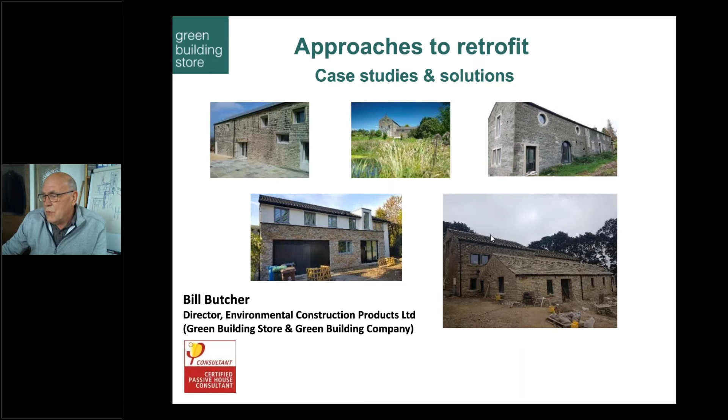Hopefully it won't be forever. So I'll just run through quickly: we basically work from the passive house methodology, fabric first - so insulation, continuity of insulation, forgive me if you know all this already, and minimizing thermal bridging, which is easier said than done with retrofit.

A minimal and continuous air tightness barrier if possible, for lots of reasons - air tightness is for comfort, for sustainability of the structure of the building itself, and for lowering energy consumption. Part of this is having an MVHR system, mechanical ventilation heat recovery. We think these work efficiently when we get air tightness below 3 air changes per hour, so that's what we'd be aiming for in these retrofits, hopefully lower.

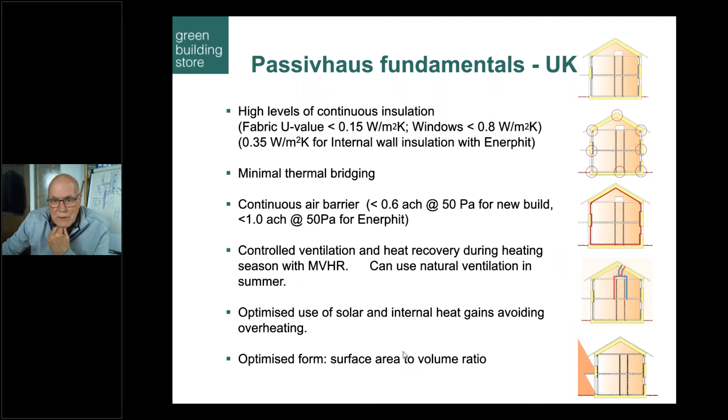In retrofit, one cannot optimize solar gain for obvious reasons, or the form factor, which is the surface against volume ratio. So it's far harder than new build.

This is the PHPP that we use for value engineering. So even if we're not going to go down to the passive house retrofit standard of EnerPHit, we still use this to value engineer, as I said before. It's a 38-layer spreadsheet which comes right through to the end, this verification sheet, for certification - which is rare, to be quite honest, in the UK - where we would be aiming for 25 kilowatt hours per meter squared energy demand.

That's about 1/10 of most of our older buildings, I would suggest, with a heating load of maybe around 14 watts per meter squared. So on a 100 meter house, that would be 1.4 kilowatts when it's -10 outside. That is the optimum.

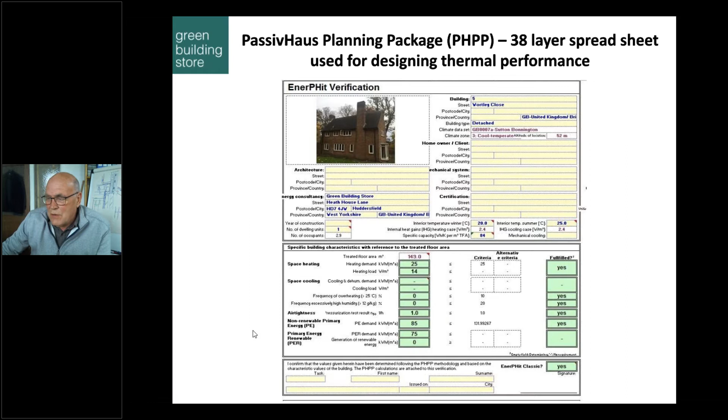We don't expect to get there on most of our retrofits, but we'll be taking that methodology and having a whole house plan, fabric first. We also have high risk, particularly where we are on top of the Pennines here - maybe similar to you in the Highlands and Islands, in that we've got high rainfall.

So particularly with solid walls, we've got to measure and work out what is the best way for insulating walls. Particularly, external wall insulation is in some ways the easiest way of retrofitting, because you keep the walls warm. Otherwise, we've got rain-driven damp if we're doing it internally, which all of these projects are, plus rising damp and interstitial condensation.

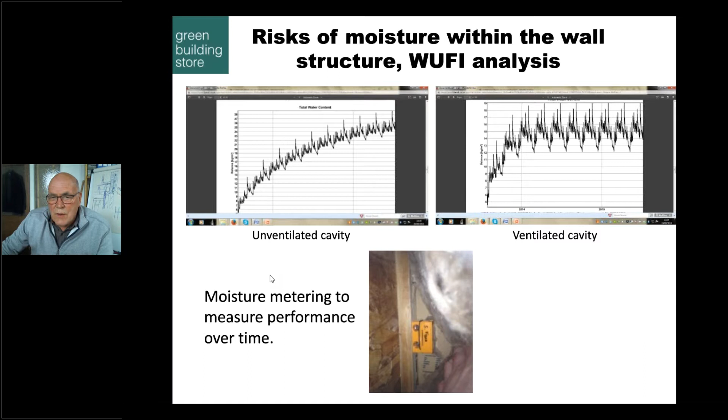From relative humidity inside - this is an example at Cumberworth, I think back in 2014. This bit here of the building, so this is our house: this is a rubble-filled stone wall of an old barn conversion, and this is a modern 1992 extension.

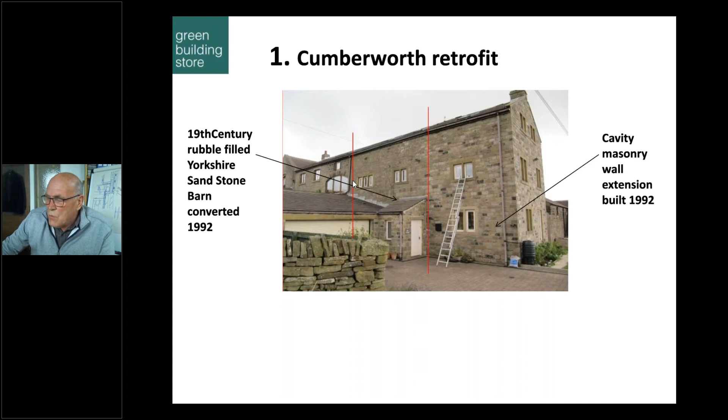We have to treat the walls differently using that software program called WUFI I mentioned earlier. So on the cavity wall side, where we've got a cavity and DPCs and cavity trays and so forth, we find that we can get away with a man-made material - in this case fiberglass, but we use an intelligent membrane. We model this build-up here: the timber is actually a service void, but look at the air tightness measures with this intelligent membrane, taping and so forth.

On the barn side, the ex-barn, we have to use more specialist materials - wood fiber wasn't going to be good enough where we are, exposed up here. So we tried this material, it's called Tectem, it's perlite from Germany. We have moisture meters in most of these projects, with the help of Leeds Beckett University, the AECB, and in this case Knauf, and we measure their performance over time.

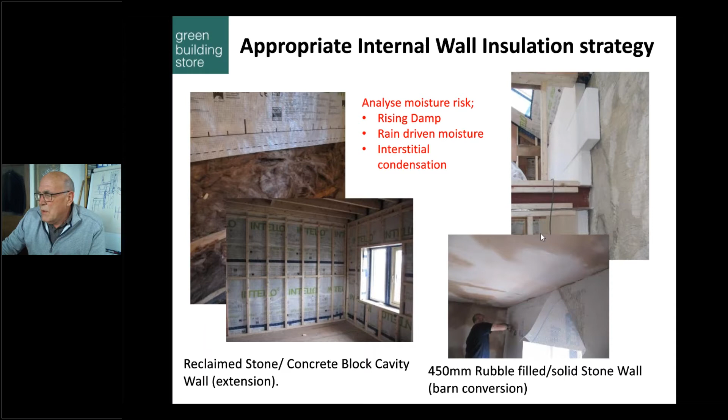It is expensive, but we found that it works excellently. We're looking for a WME, wood moisture equivalent, of around 20 to 25%. And this material has sorted it out on this barn where they had a lot of problems beforehand.

Thermal bridging. Look, we take the insulation through intermediate floors, so we'll move floor joists, for example, to continue the air tightness strategy and insulation strategy.

In this case, we didn't want to interfere with the size of windows. We'd replaced these 5 years previously with triple glazed windows. They weren't going to pay for more. So we've used VIPs, vacuum insulated panels, with a far better lambda value for the reveals.

Here you have to deal with the intersecting partition walls, particularly the masonry ones. They're a big thermal bridge, so we're trying to warm them up to alleviate moisture and mold growth. And also thresholds. Here we've used foam glass around steel joists into walls because we want to keep the steel warm.

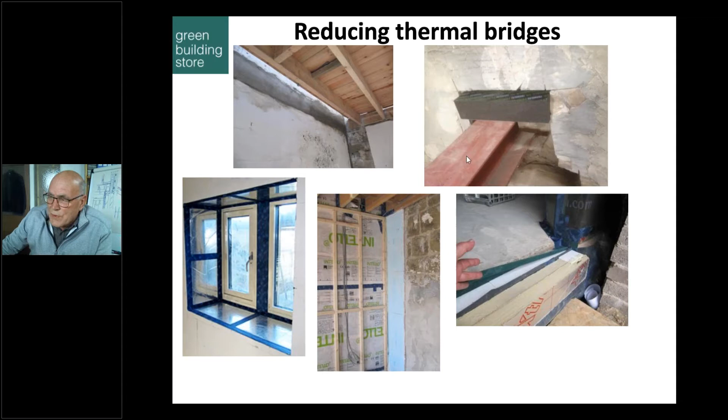This is a barn and farmhouse renovation in Meltham, another village, in fact the village I live in. So this is what we go through.

So we've identified the wall, we've identified the risks, we come up with a potential solution, and in this case we're using something called Diathonite, which is from Italy. It's basically lime, cork and diatomaceous earth, and then we check it with WUFI as an analysis.

Do we need brick cream, for example, on the outside for it to maintain that level of 20%, just going back. Oh, how do I go backwards, Danielle? It should be at the bottom of your screen on the left, if it'll allow you to. Oh yeah, sorry, I apologise.

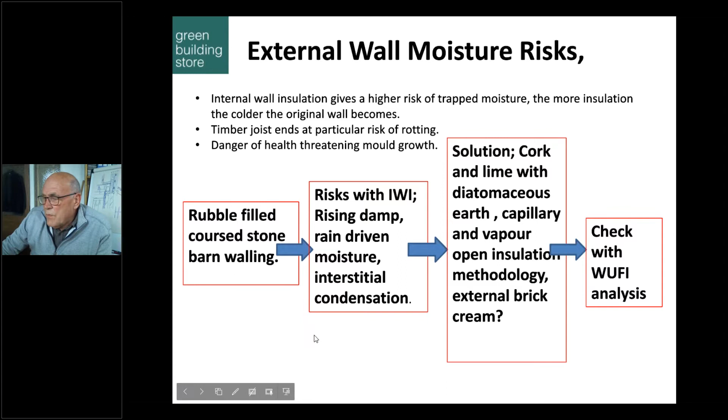So here we are. This system sprays on and has got a lot of advantages, but again, to be quite honest, is expensive. But actually, it does everything in one. So it's airtight, it's capillary and vapor open. It's hard, so you can hang cupboards off it and things like that.

And it looks like Santa's grotto, doesn't it, actually? But then you've got a lime finish on the outside. This, I feel, is the best way of dealing with high exposure masonry buildings. But again, it costs, but there again, there are no risks, well, very low risks with it.

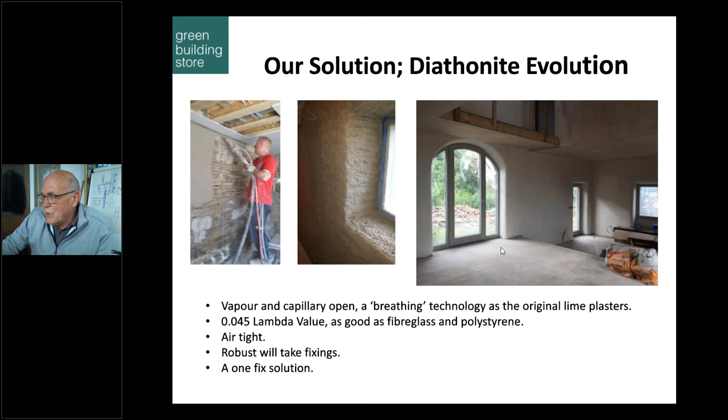This is another methodology we've used. This is for the Yorkshire Wildlife Trust, an education centre for the kids. This is the building I really love, actually.

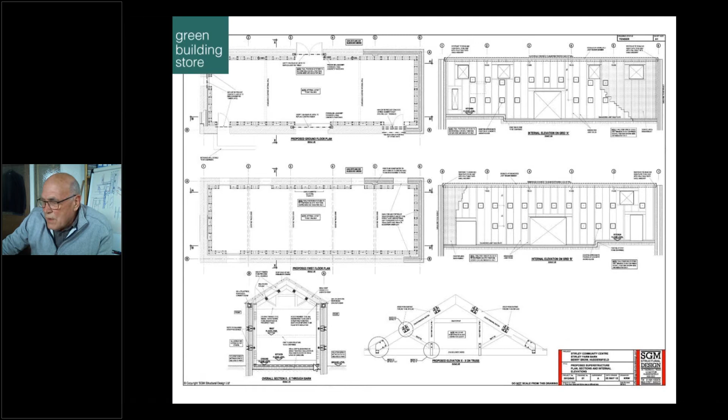We had to build a box within a box, timber frame to hold the masonry up. All these portholes are actually concrete with stainless steel bars set into the masonry, and we anchor it into the timber frame. This is an example.

Look, we've got all those things. We could go back to those pillars of wisdom earlier if you like. So continuity of insulation, air tightness, concrete, and chipboard here as... what's it called? Pro Plus, I think, this board here.

But we had to ventilate the cavity, and we lose a lot of floor space with it. But we're able with this to get down to a U value of 0.15. When we put internal wall insulation against the masonry wall, we don't go below 0.35 U value. It's deemed as dangerous otherwise towards moisture buildup, particularly around intermediate floor joists.

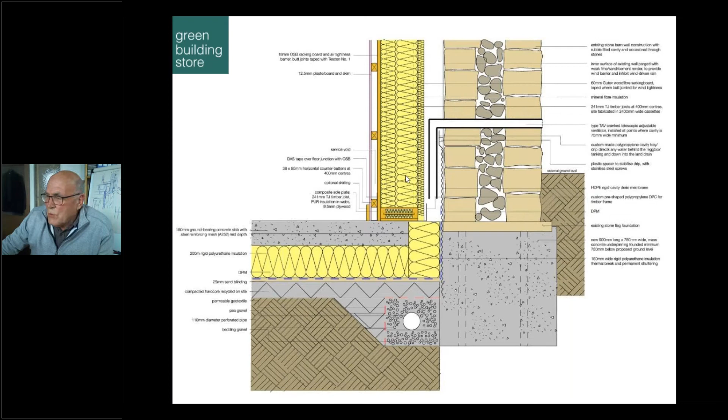But we aren't purists, and Ahul, who will come after me, will disapprove of this, but we will use Kingspan. We will use polyurethane. We're pragmatic. We've got climate change now. People do not want to lose floor space, and this is really quite the cheapest way of doing it.

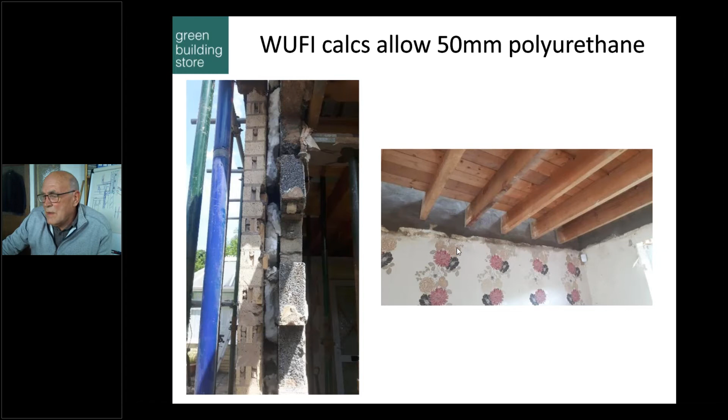And if it goes through WUFI and it's showing that there is minimal danger to timber within the walls and to stop any mold growth, we'll use polyurethane. A lot of companies that we work with would use wood fibre here, but of course the lambda value for wood fibre is half as good as polyurethane. This is maybe a moral argument.

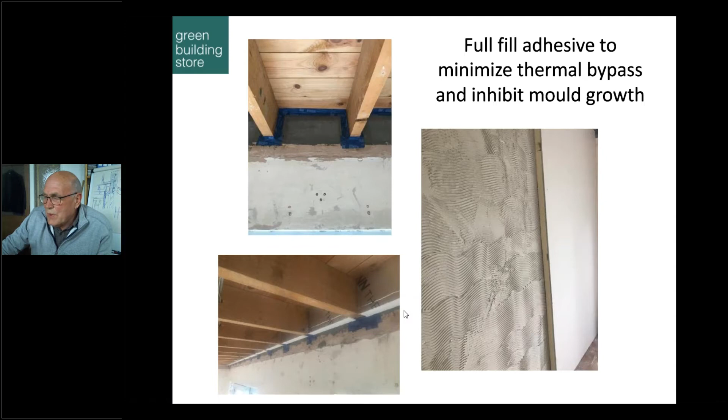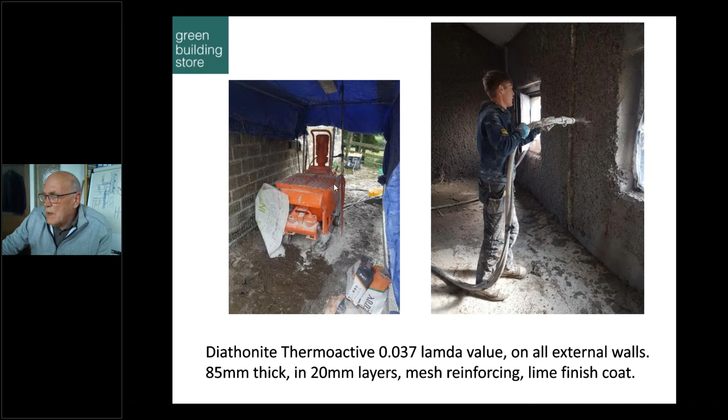I'd be interested to see what people think later. This is the last project we've done, at Holmfirth. Here we are again spraying with a new version of the Diathonite. It's called Thermoactive, and we're down to a 0.037 lambda value. So to get to that 0.35 U value, we're spraying at 85 mil of thickness.

Windows are really important at all of these jobs, where we're sorting out thermal bridging around windows here. Look, air tightness taping and wind tightness outside. We're particularly happy with this job actually in this way.

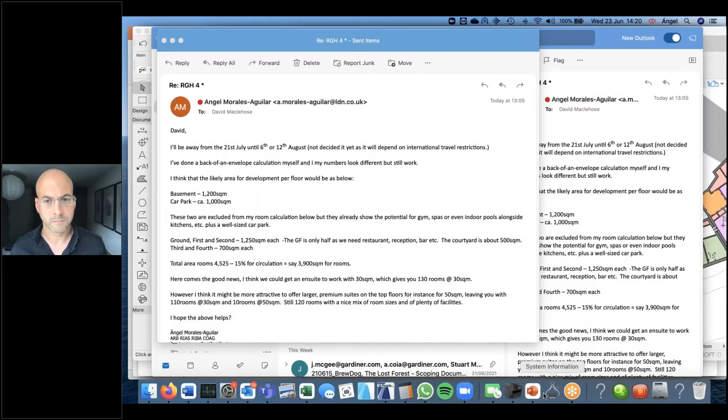Thank you, John. Hope you can all see that all right. Yep, perfect, thank you.

Well, as I mentioned to Bill before, it's a bit of an honor to come up after him, but also a bit of a responsibility because Bill is quite well known in the retrofit and passive house ecosystem as somebody who knows a lot. So while Bill has been focusing on all different options, solutions and details, my presentation is going to be more about process from an architectural point of view.

Just before starting, I'd like to highlight that this project we're talking about, we are still in this journey, still kind of halfway through it. We're now engaging with the contractor, but I'm not going to be able to show finished images or different details being applied. What I hope to share today is how we have approached the design stage of the retrofit.

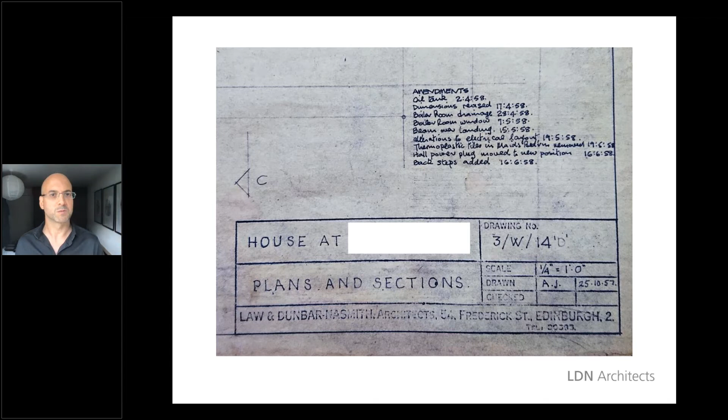As you can see here, the 25th of October 1957 is the date on this drawing, which we found. We found the original drawings that had been kept by the client. My dad was 8 years old when this house was built, so for us, this is part of a heritage that I think is worth maintaining.

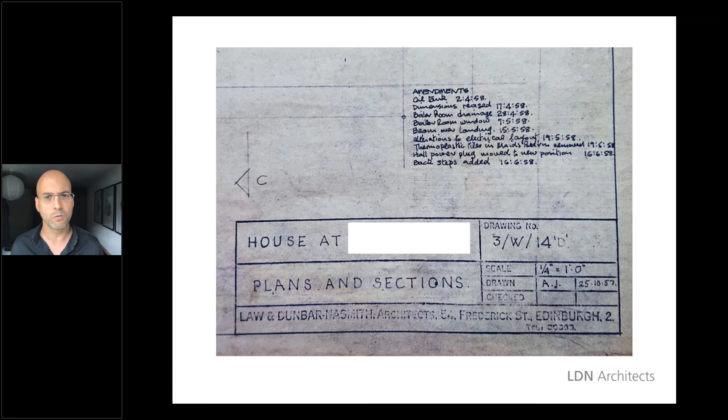When the client came back to us, they were concerned about the failing cladding they had, but they themselves suggested that maybe we could just knock the house down and start over again. And we said, no way, the house is worth keeping, and we should just refurbish it.

We unearthed some drawings that helped us understand how the house had been built, because the house, which had an extension built in the 1980s, had no drawings available that we could use. So the first part of a retrofit project like this is creating a knowledge base where you can start working off your own drawings.

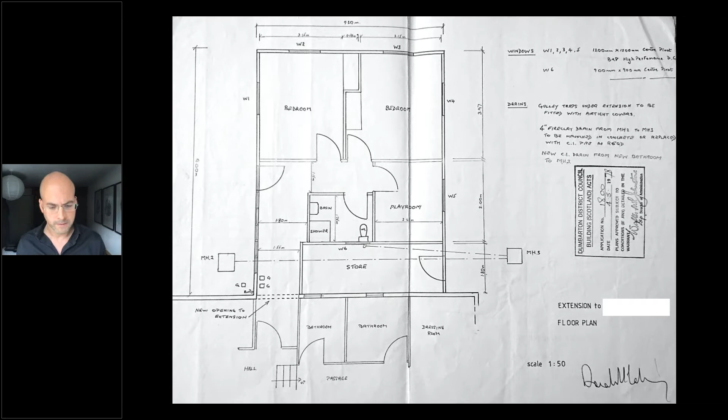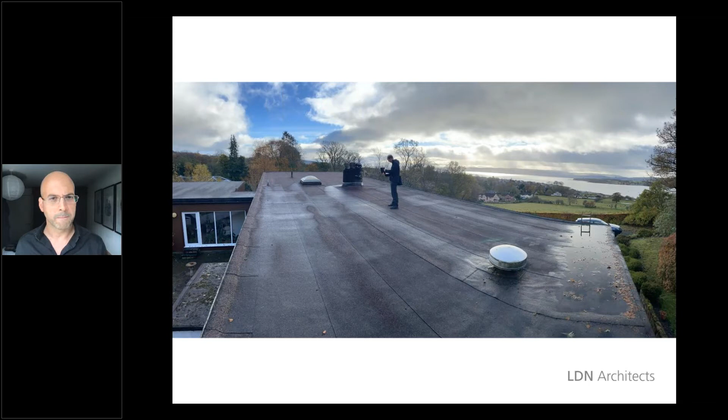Obviously, the house is quite tired, the roof membrane was failing, not very sympathetic detailing throughout. So in a way, it was a house that actually needed some TLC, really.

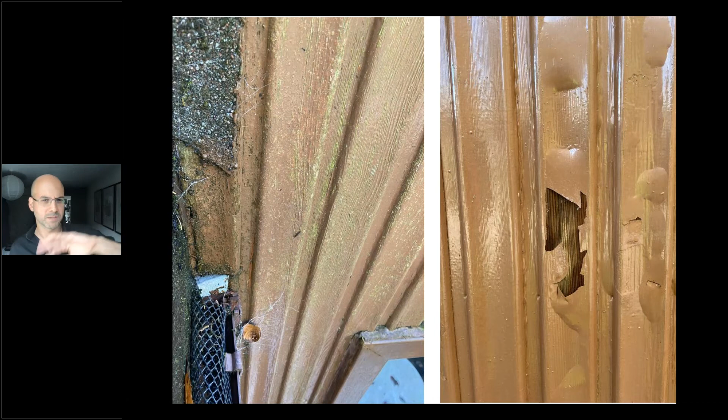The timber cladding was failing, with a lot of felt just wrapped around it, not letting the timber breathe. The build showed that the ground floor, the solum, was actually quite dry, which means it has worked quite well as a strategy for keeping water out. But it's completely uninsulated, which means the main part of the house is just absolutely freezing in winter and most of the year, really.

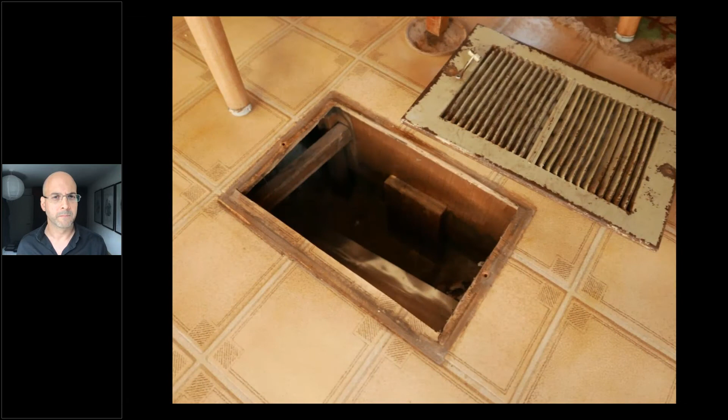The services are very dated, and here is an interesting thing: the different owners of the house—our client is the third owner—had approached different tradesmen just to help them resolve some of the problems they had. Nothing wrong with tradesmen, but very often there is a lack of understanding that you need to take a holistic approach when you really want to resolve these problems.

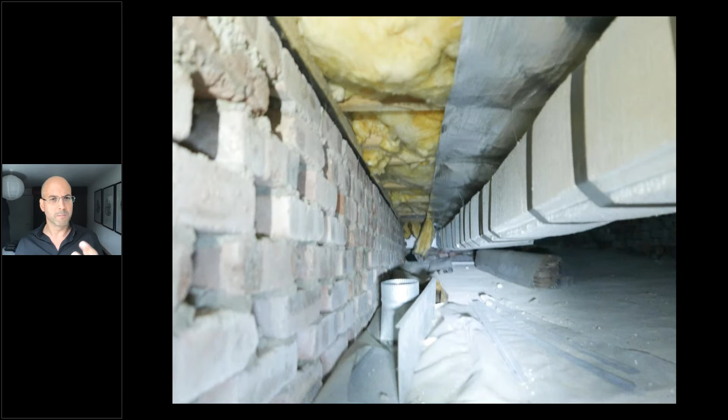So if you go to a heating specialist, he'll just change the boiler, not even thinking that the ductwork is uninsulated, like in this case, or poorly insulated. This is the extension where some insulation was put in, but it wasn't kept in position, so it's not airtight, so its performance is diminished greatly.

So that's why I think it's important for people who want to do a retrofit of their houses to contact an architect that can give them a wider, more holistic idea of how the problems can be resolved.

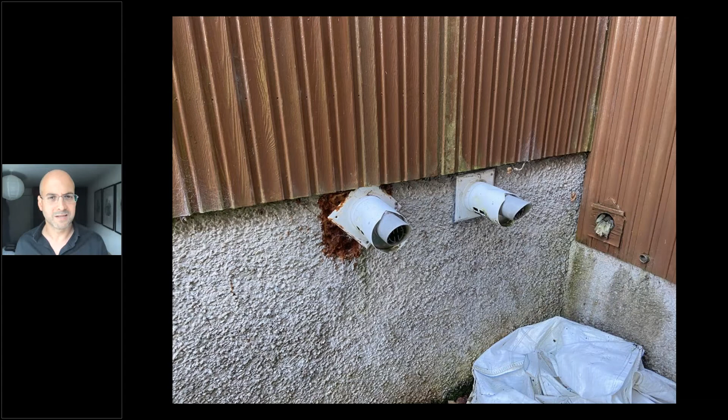Some pretty unsympathetic services interventions like this—flues come out of the plant room, which is here. There were a number of problems with the heating system. Some of the plenum connecting the gas boiler with the main ductwork was flooding regularly, so what the client was getting is warm but humid air, which created issues of internal air quality, particularly because his daughter is asthmatic.

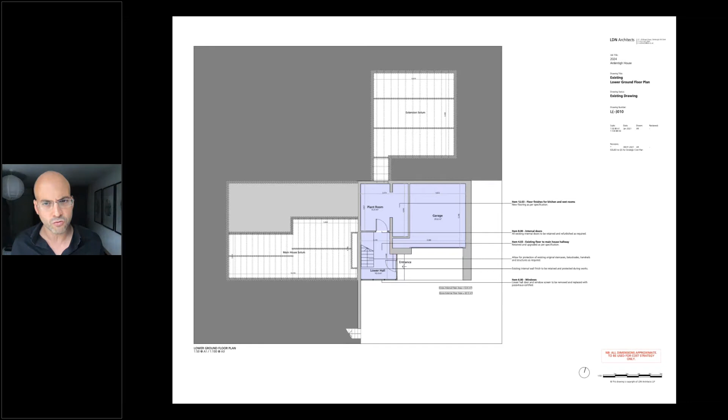So in a way, what we had to do, as I said before, is we started by creating our own knowledge base. We created 2D drawings, and from those 2D drawings, we started to analyze what the problems were. All these coloring lines basically describe the different things that had to be done in order to achieve what is a very interesting point.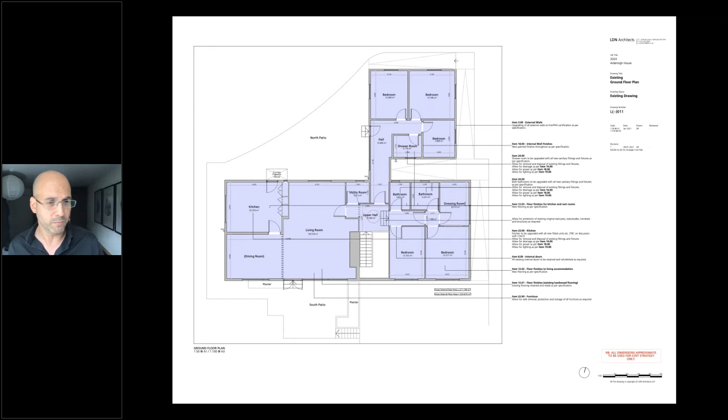At this point, we introduced to the client the concept of passive house. They had heard of it but didn't know much about it. So I gave them a chat about it, which I've done a few times, basically explaining what the principles of passive house are, but trying to keep it accessible, not patronizing, so people understand the principles.

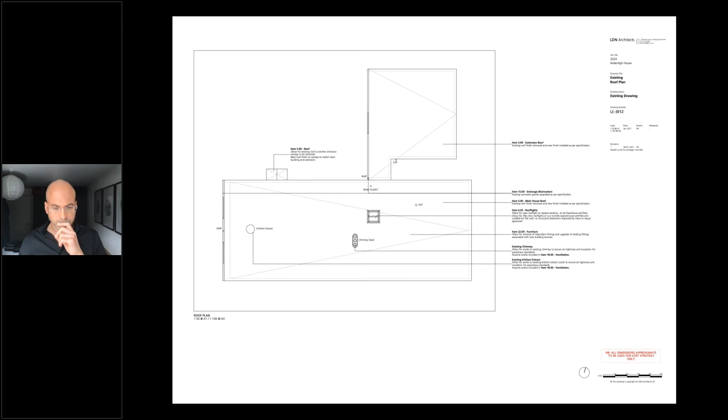Sometimes we get a bit too techy. When we actually decided to start working on the project, or stating the scope of it, we realized that the client didn't really know how much was needed. This meant that when we prepared these drawings, we thought about creating 3D visuals that help them understand which parts of the house we were thinking about touching, and which ones maybe could be left out.

We always do this as a matter of fact, but in this project it really helped the client understand in which areas we're planning to work the most. We even created a 3D model of the structure so they could understand if we had to go back to the sticks, what that would actually mean.

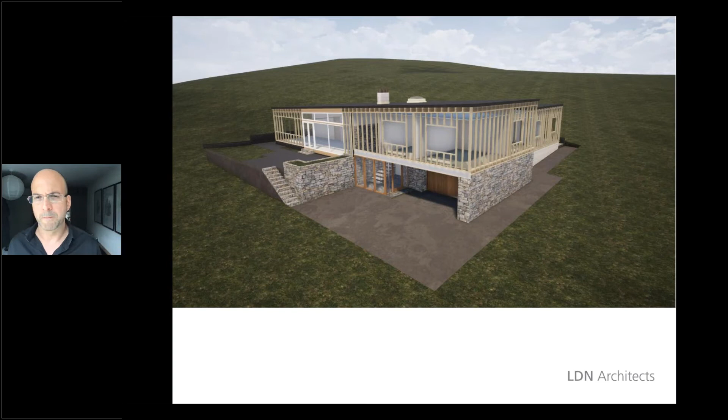But then I've just described sort of what a house is. So the rest of my presentation is going to be different - you're not going to see any more photos or technical details. It's more about a mental diagram of how I see, after my experience in this project but also in other projects, the three elements that are, in my view, to be considered mostly when you talk about a retrofit project. They all evolve around cost, performance, and disruption.

In the case of the house on the slope, performance was the first thing we thought about. Obviously the house is failing in many ways, so how can we tackle that? What is the actual performance baseline we're going to create? For us, that was passive house. We talk about a thermal envelope, air infiltration, moisture management, sound comfort, durability.

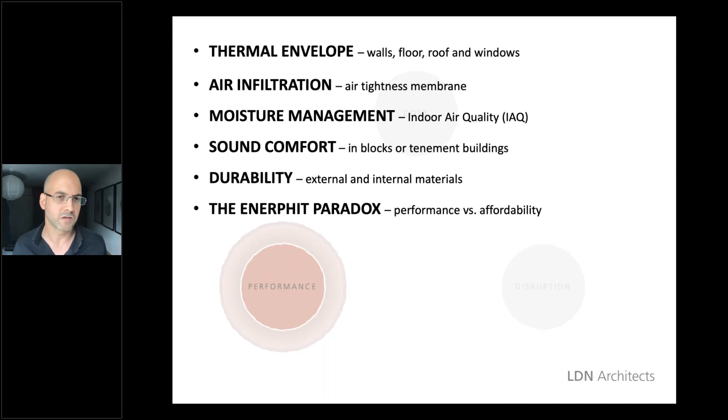But that led us to something that Bill mentioned as well before - the EnerPHit paradox. That is the fact that to achieve the level of performance you need for Passive House often makes the project completely uneconomical. Even if the client wanted to get to the best performance they could, Passive House is a good gold standard to aspire to, but very rarely is something you can really obtain because the costs are just too high.

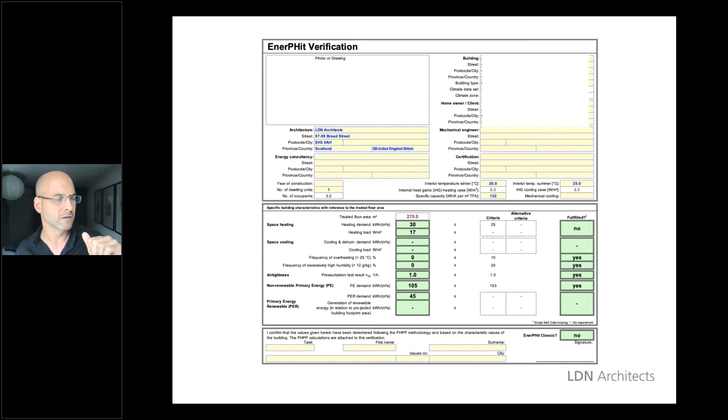We basically used PHPP not just as a certification tool, but also as a design tool. It helped us set the baselines of levels of insulation, infiltration, and things like that, only to discover that most of them were actually maybe too expensive - but I'll get to that in a minute.

So the details we prepared at this stage, scoping the project, were all supposed to be for Passive House standards. Huge levels of insulation, air tightness, and basically recladding - going back to the sticks and building the house over again. The same on the ground, trying to break all this passage of air.

You can see on the top here the absolutely tiny amount of insulation that was inside. It's actually quite interesting because the client installed PVC windows about 10 years ago, and the windows were so thick that they had to create an apron inside the house because the walls were too thin.

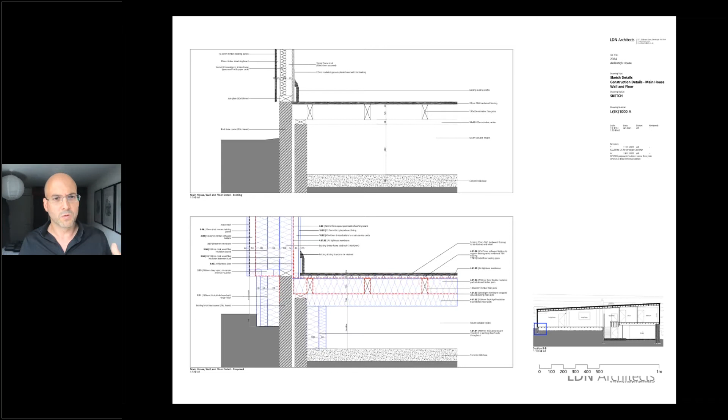The next item to consider is cost. Obviously this is very often the king - I mean, cost is always the driving factor, but not always, and I'll mention that in a minute. Cost actually has a huge impact because it limits how much you can do.

There are different ways you can look at costs - from capital costs, upfront investment obviously, to running costs, which is also a form of deferred investment or bills. That's becoming more and more important because of the higher cost of energy going up. But also environmental costs, which we find some clients are quite interested in, both from an operational carbon point of view - the carbon you produce to keep your house warm - and also the embedded carbon, the energy used to produce the materials you use.

This goes back to what Bill mentioned before. I do advocate for natural materials, but I understand as well that sometimes we need to use petrochemical materials, as evil as that sounds. But in my case, I always try not to use them. In this case, the house on the slope, we've gone for wood fiber throughout.

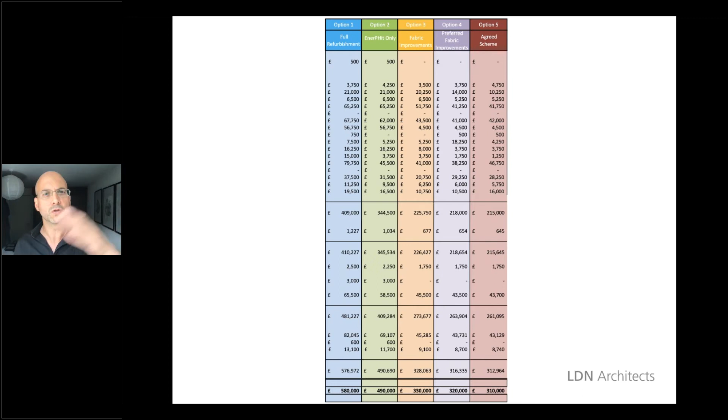And we need to hone our tools to make sure that we can go through all these stages without upsetting our client, but also without upsetting ourselves, because this is a process where the client is getting to understand how much you actually need to spend on this project.

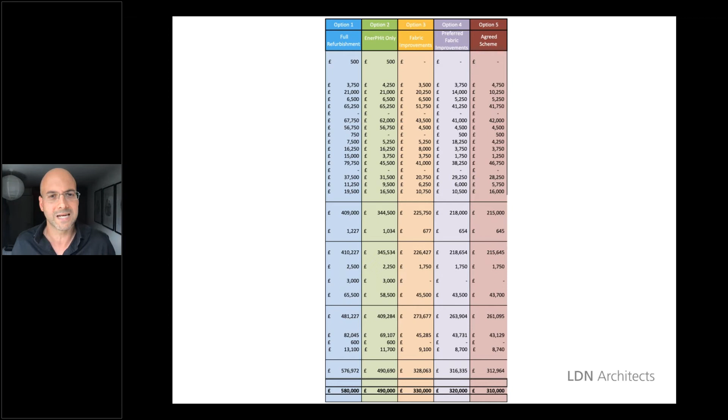And the last one, which is quite important, is disruption. Disruption is key because it has loads of different dimensions: physical, operational, emotional. In the case of the house on the slope, we talk about a man in his 80s who really can't face the fact of leaving his house, or even moving storage, let alone the dust and noise.

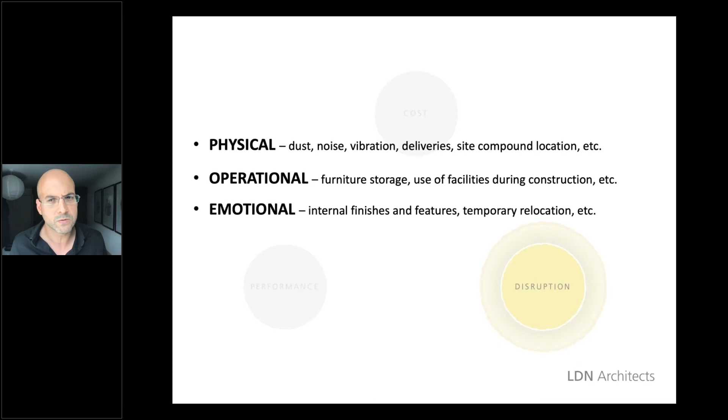So, for instance, we show them the different bathrooms they could have. In a way, we brought them along with us to say that the disruption they're going to have to suffer, which is unavoidable, will make sense by showing them different options and something that was important for them.

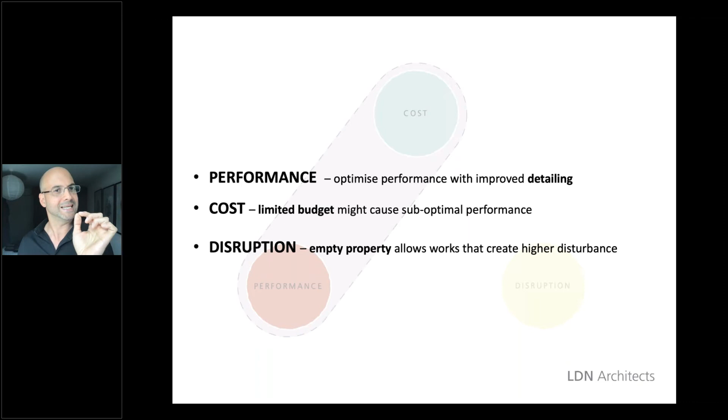When you put the two together, you get different kinds of projects. When performance and cost are the main drivers, disruption is not an issue, which means you're probably in an empty property, which means that you have a limited budget and you will obtain a suboptimal performance, but by using the right detailing, because you're not disturbing anyone, you can actually optimize the performance.

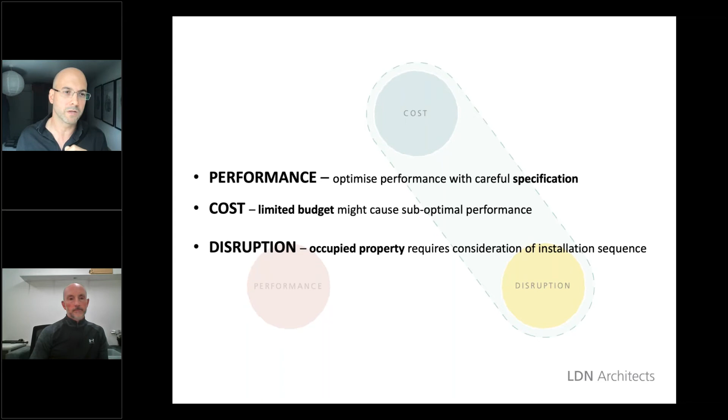When cost and disruption are the main drivers, which is, I would say, 80% of the cases in most projects, then the performance has to be careful with the specification, because you only have very little money you can spend. So the cost is limited, but disruption, because it's occupied, you need to take that into consideration as well.

And the last one is the case of the house on the slope. I don't mean that the cost is not an issue, but it's not as much an issue as the fact that the client wants their house to be warm and they want to stay in the house, which means the disruption has to be completely considered. In this kind of case, specification very carefully selected can help you achieve the performance you want, because the cost in this particular case is not a huge issue.

It means if you play it right and you know and choose the right things, you can get an optimal design. It might not be EnerPHit, and in this case it will not be, but it will still improve hugely the comfort of the occupants, which is what you should focus on in a job like this.

The occupants and their comfort is always a driving factor, but in jobs like this it is even more so, because they're going to remain in the house, and staying in the house means that they will suffer what we would normally do. Imagine when you do up your house, but it's you doing it. Imagine when it's somebody else just walking through your living room, in a way.

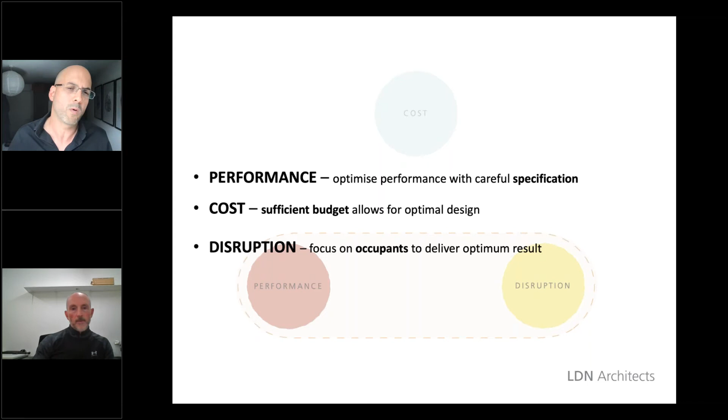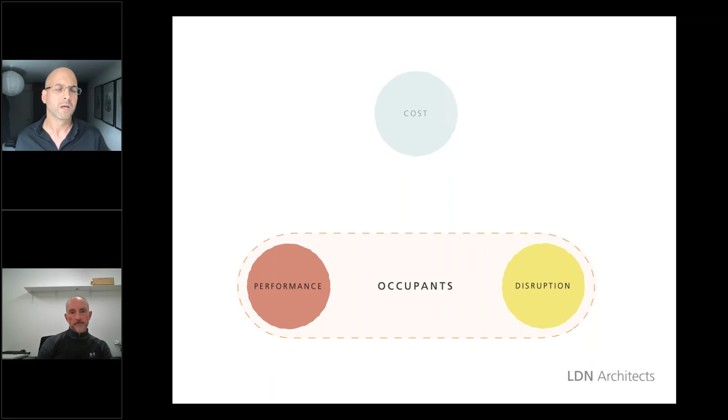So that's why for us, in the house on the slope, it's the occupants that play the main driver when it comes to making this sort of decisions. That's something you need to make. All in all, in reality, all these three things are always to be considered together.

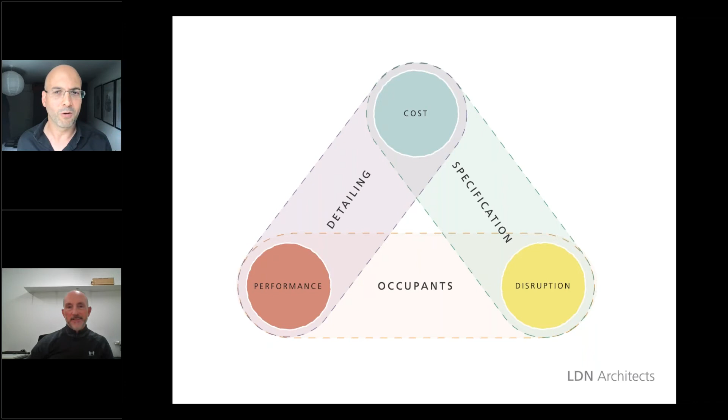We are at a point where we've finalized pretty much the design stage, and we've now got into negotiation with a contractor. So watch this space, as I say, and hopefully I can present to you next year how all of this actually turns out. So thank you very much.

Thank you, Anna. That was a fascinating run through a very complicated project, advocating the design-led aspects, and the desirable architect-led approach as well, and also linking together performance, cost, and disruption, and taking all of those factors into consideration. And I think you're right. We'd be delighted to have you back next year and let us know how it's going.

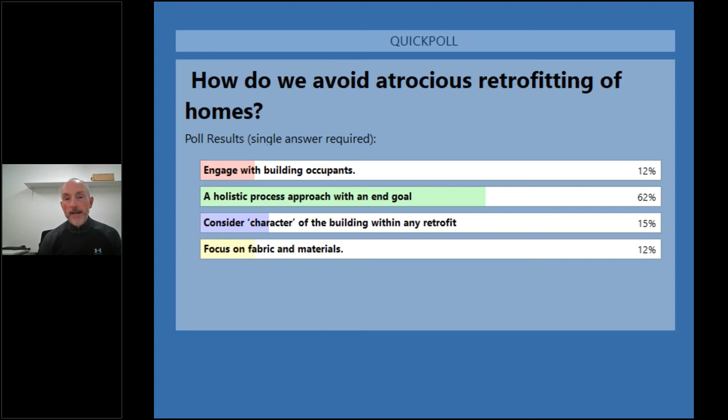So, how do we avoid atrocious retrofitting? There's a clear leader there with a holistic process approach with an end goal. So that kind of fail to plan, plan to fail. Absolutely, have an end goal and make sure it's all planned out.

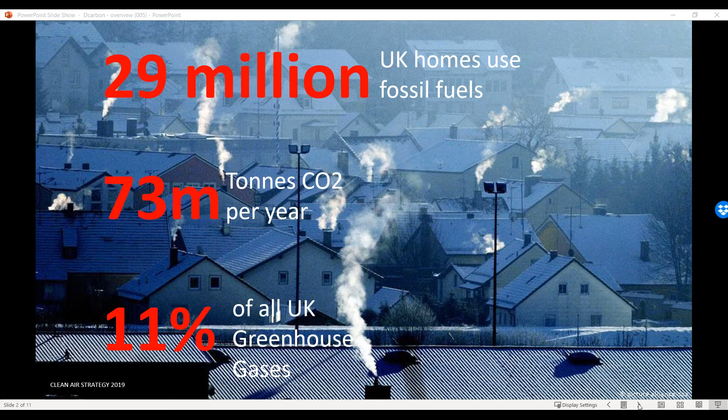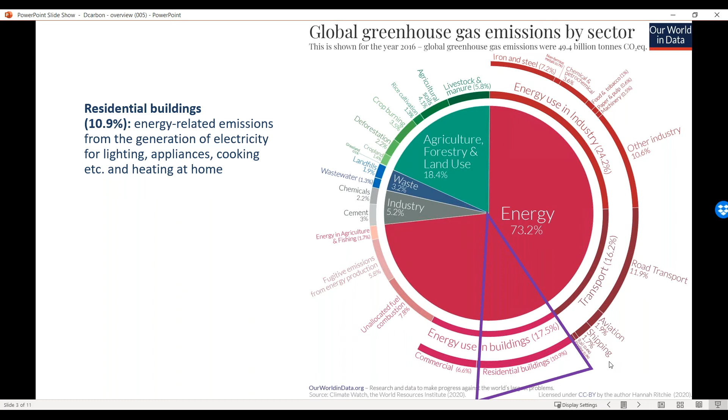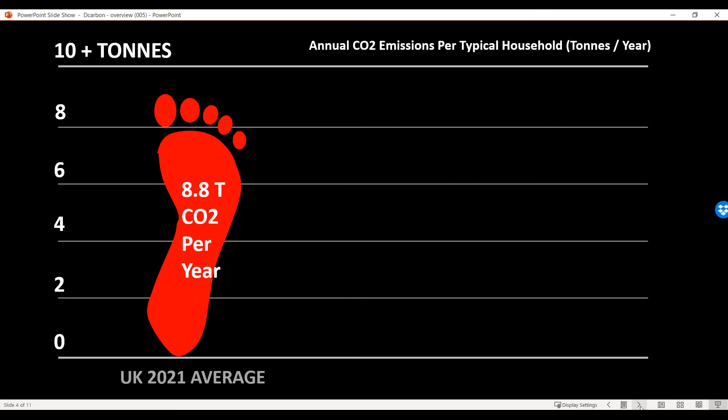So if we look at that on a household basis, approximately 9 tonnes of CO2 is being produced per year on average for an average UK home. And if you break it down, that equates to almost 30% due to heating alone. And to meet our UK 2050 net zero targets, we've got to reduce that footprint by a massive 95%. So you can see that's going to have to be reduced down to 5% of what it currently is.

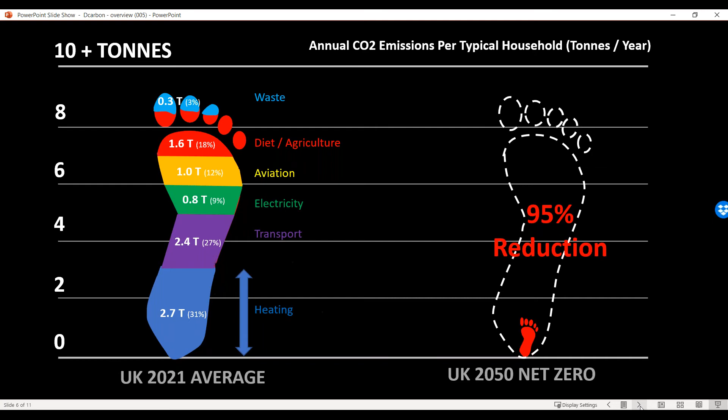So how are we going to do that? We're going to take the harmful emissions from your fossil fuel system and filter it to produce clean air at the other end. By filtering it, we're going to take out particulate matter, take out the toxic gases via a CAT system, take out the CO2 by sequestration, and we're going to have a monitoring system built into the system that can give you information on an app or be transferred to your local or national authorities.

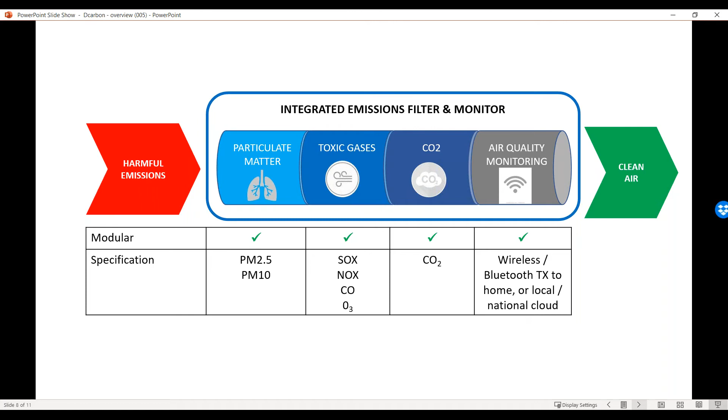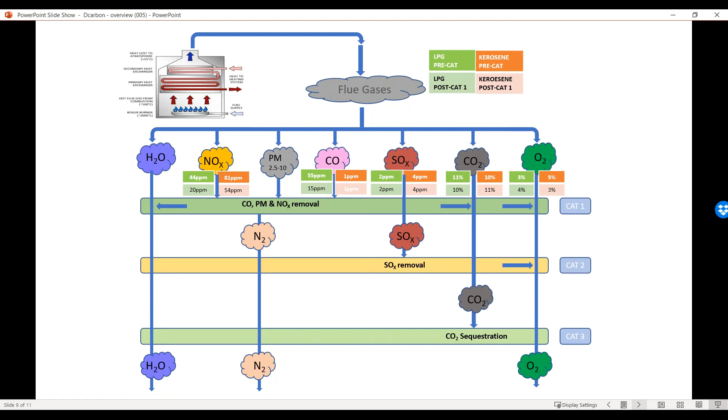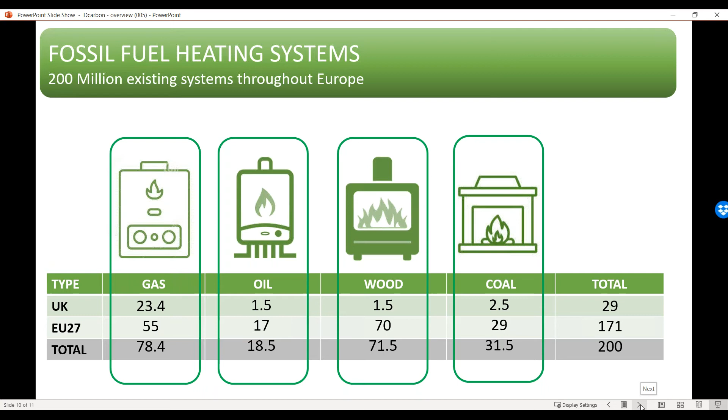Next slide, if you just click through it, Danielle, to the end, you will see gas is probably the predominant one in the UK, which we'll target first, but there's also oil, wood, and coal fossil fuel systems, which we will address later on in the life of the organisation. So, DCarbon - what we're trying to do is heat without pollution. Thank you very much.

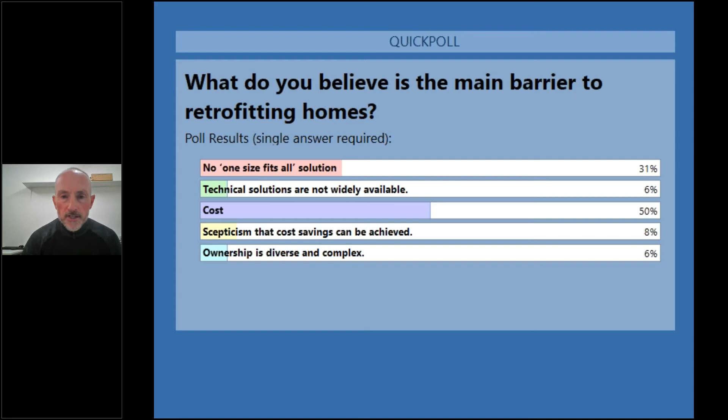So interestingly there, the cost is clearly the leader in terms of the main barrier. I think we would all agree that they're all barriers to retrofitting our homes and key challenges going forward, but certainly cost is one of them. Interestingly, I heard last week that if we were to replace all our gas boilers or fossil fuel boilers and heating systems in homes in the UK and Scotland, it would cost about £250 billion to replace all the boilers, and roughly about £10,000 per household. And the challenge was, well, who pays for that and how is it paid for?